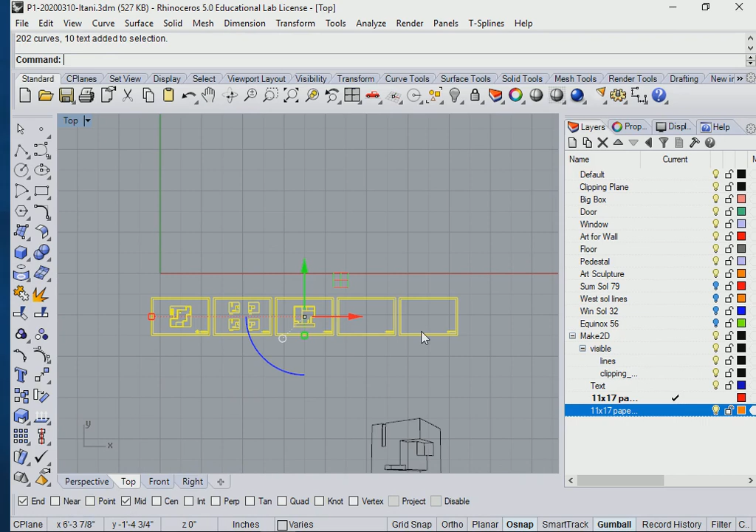It doesn't help to print it at the last moment. It helps to print it ahead of time, in case something doesn't come out, you discover you don't have money in your Bursar's card, the printer is out of ink, or it shows something on the screen but something else comes out of the printer. So this is the life of the architect—they always print ahead of time because sometimes what comes out of the printer is a total shock to you.

Okay, so please, let's get used to doing that. I know it's difficult when you have deadlines. Believe me, we know what that means.

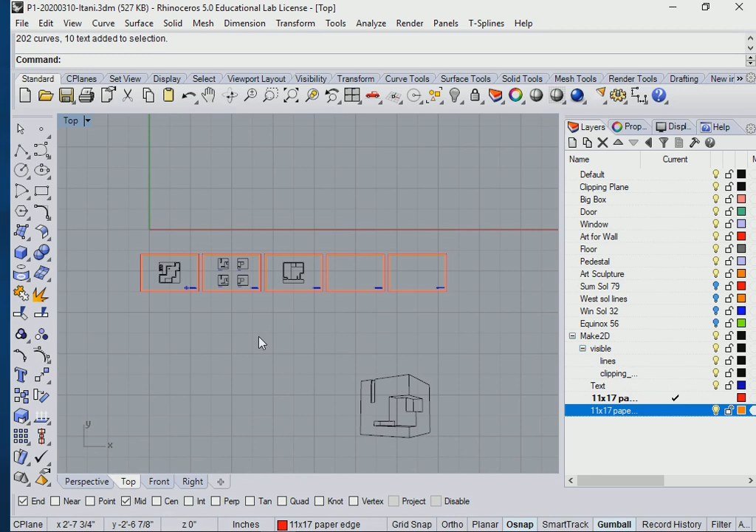You're going to have a floor plan. The floor plan gets a north arrow, and it's going to be 1/4 inch. You're going to have exterior elevations, tied elevations, at 1/8 inch. All the elevations are together and they're going to relate to each other.

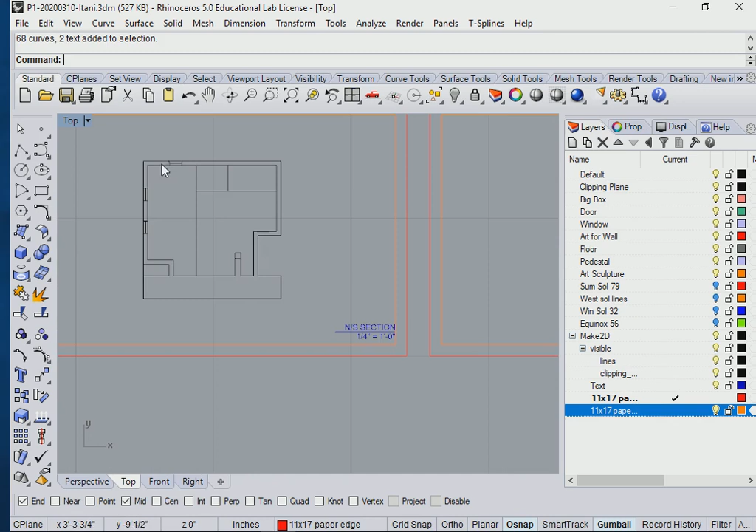You're going to have a north-south section. The north-south section shows the art pedestal and your 3 windows facing south. Then you're going to have your east-west section—see how pretty this east-west section is? The east-west section includes your west-facing window and your art piece on the east wall.

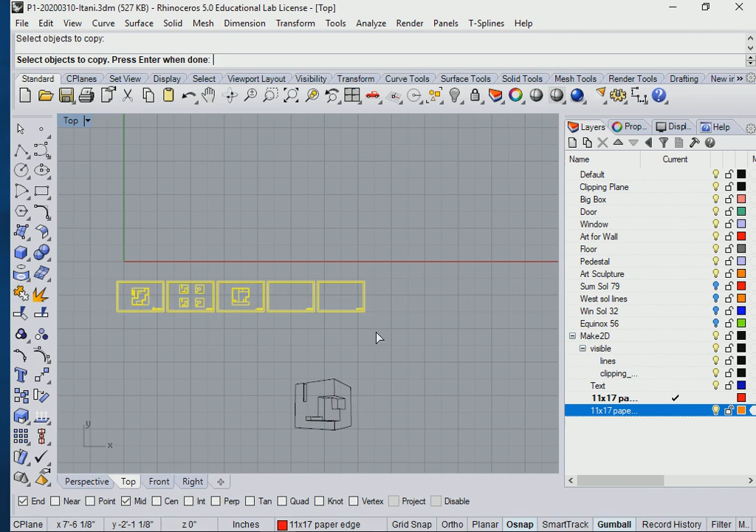And then you're going to have a perspective also, and it's going to talk about the appropriate scale and views that we talked about in class. So please have this printed next time. Your border and your border paper is not going to be printable—they're going to be locked.

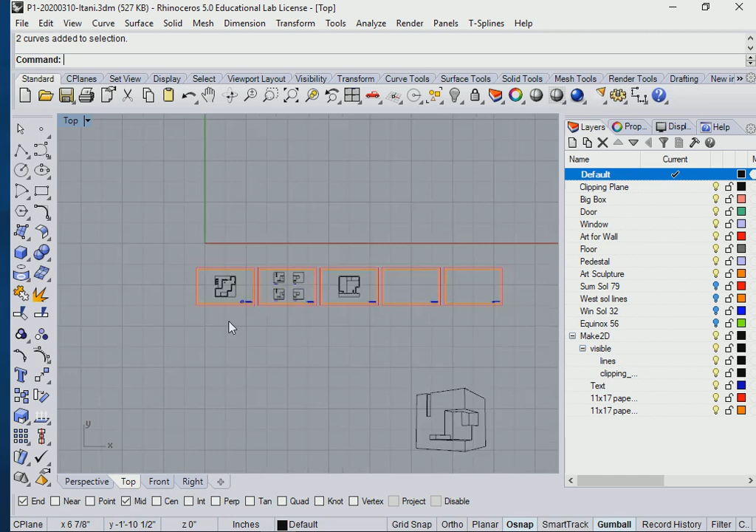Okay, so how do you print this onto paper? How do you make that work? Okay, you're going to go to one of these. You're going to go to File. You're going to go to Print. Okay, and then you're going to go here.

So to print these guys, you're just going to go to File, Print, and you're going to choose the printer. Which printer do you want to print on? You tell it, first you want to print to a PDF—you want to do a digital print. And then you open the digital print, the PDF, and then you print to the real printer from there. So the first one is Adobe PDF.

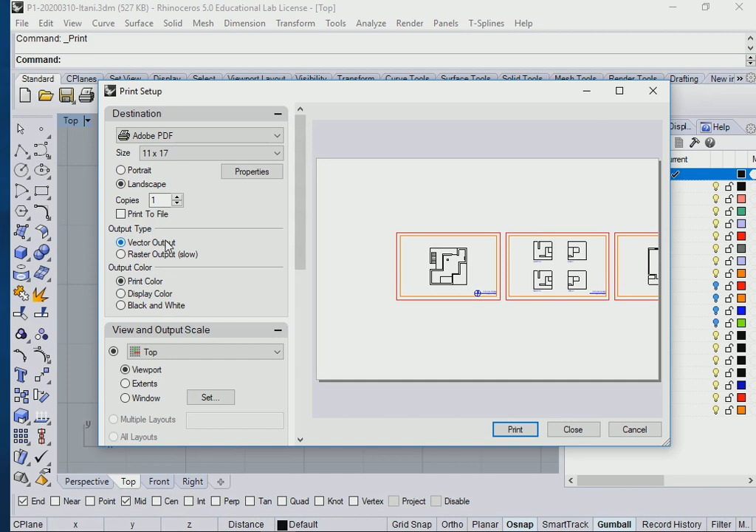Okay, and you choose 11 by 17. And is it going to be portrait or is it going to be landscape? It's going to be landscape. Okay, vector output—that means just line work, no photographs, right? Vector output. Do I print in color? No, you're going to be paying more money.

If I click this button, it's going to charge me more. And why do I need to pay for it if I didn't draw anything in color? So make sure you click on black and white, okay? Not color, black and white.

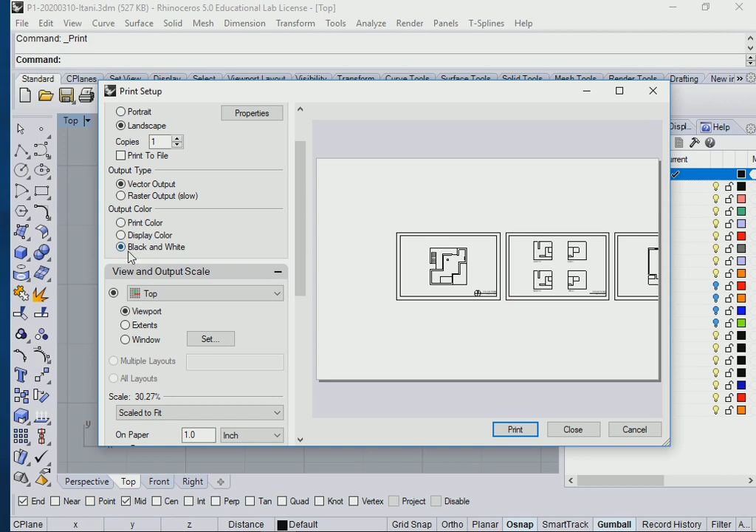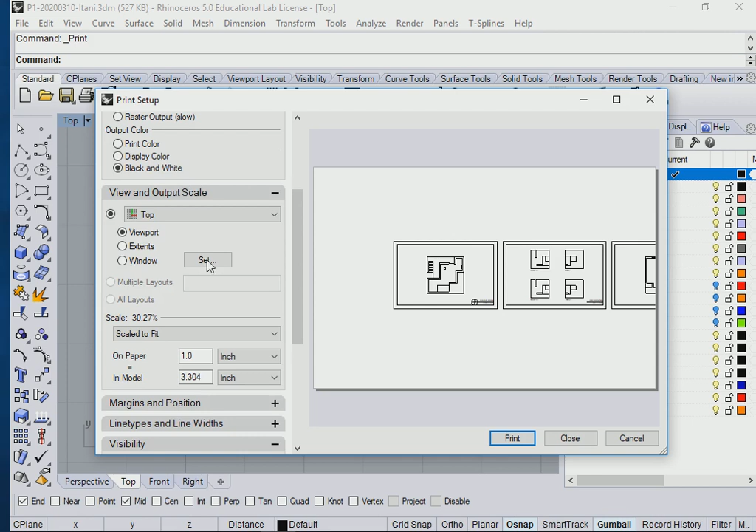And which view? Well, it's the top view, because your 2Ds went to top view. So you choose top view here, okay? And then underneath the top view, you click on window. You don't want to print this and this and this—you just want to print this. So you go to window. It says, oh, you want a window? Okay, then tell me where the window is. Now I'm going to show it where the window is.

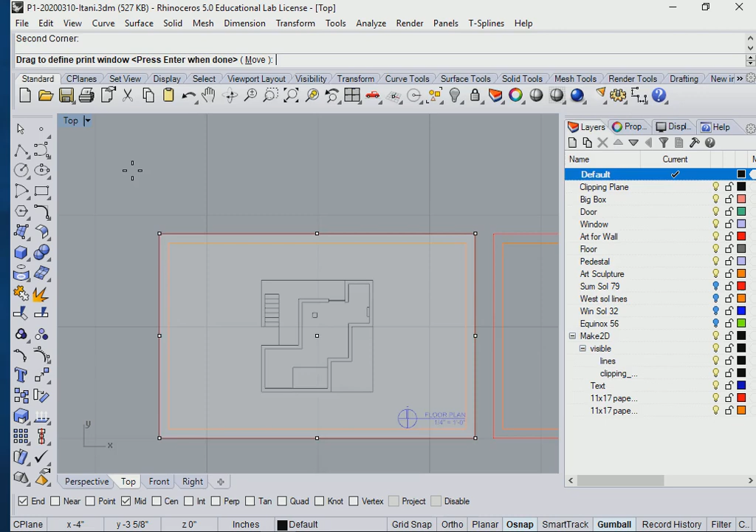Go approximately from this red line, right there, and it's going to snap. Go to the other red line. And then when you're done, press Enter—I'm going to press Enter on my keyboard. Okay, now let's scroll down for more options. Scale—do I do a scale to fit?

Do I do... oh, we drew this as a 1/4 inch, so let me find my 1/4 inch. Is that right?

Remember this: you're printing on paper and you've already scaled your digital drawing. If you scale it again here, then you're scaling it multiple times, and that is wrong. You scale it once, okay?

And you've already done so. So go here and find where it says 1 to 1. Don't even do scale to fit. If you do scale to fit, it's still going to mess up your scale that you've already worked hard on making. It's going to scale it a little bit up or down to fit it on the sheet.

And it's the wrong scale still. So you go to 1 to 1. Okay? Perfect, 1 to 1. Don't worry about that it says 1/4 inch, and don't do scale to fit. I'm telling you right now, it's on video. I'll play the video back if somebody does this.

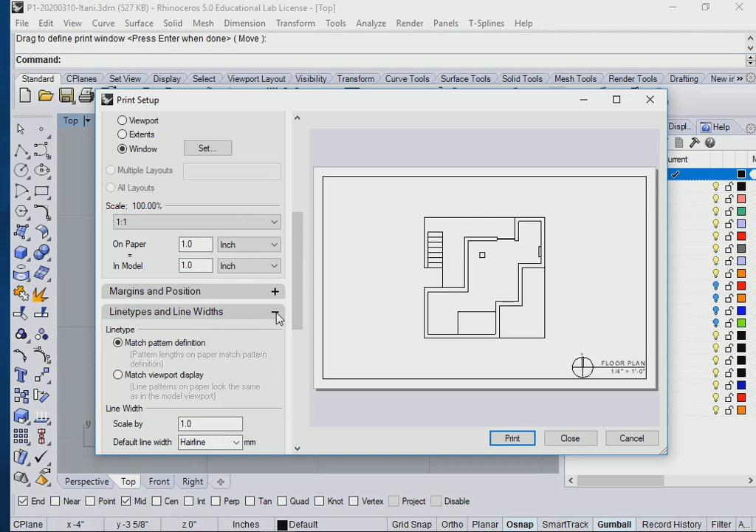Visibility is important. Do you guys remember that we took the 11 by 17 and we locked them? I don't want that border around my sheet, I don't want that picture frame—it was just for my construction. It's a construction line, so under visibility, I'm going to say show locked objects. No, so I'm going to uncheck it.

Printer details, I don't think you need to worry about that. Okay, and I think that's pretty much it. Then you go ahead and click print.

And it tells you, okay, I'll print it for you as a PDF format, digital. Tell me where you want to save it. Save PDF file as—I'm going to keep that same name, but I'm going to call it FP for floor plan, right?

And what am I going to do? I'm going to change the date. What's the date today? 12? So it's project 1, this is the date, it's FP for floor plan.

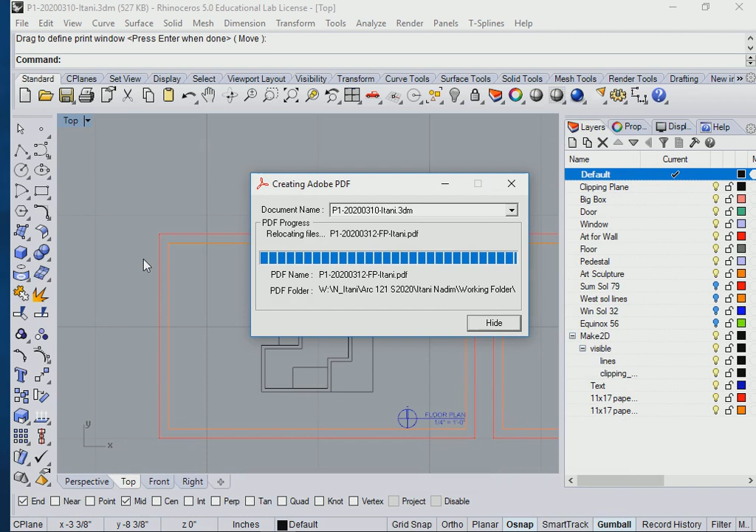I didn't put it in homework because it's not digital homework, it's paper homework. So did this work? No. So that's what I'm going to get—it's going to print that outline. So something doesn't work, something didn't work.

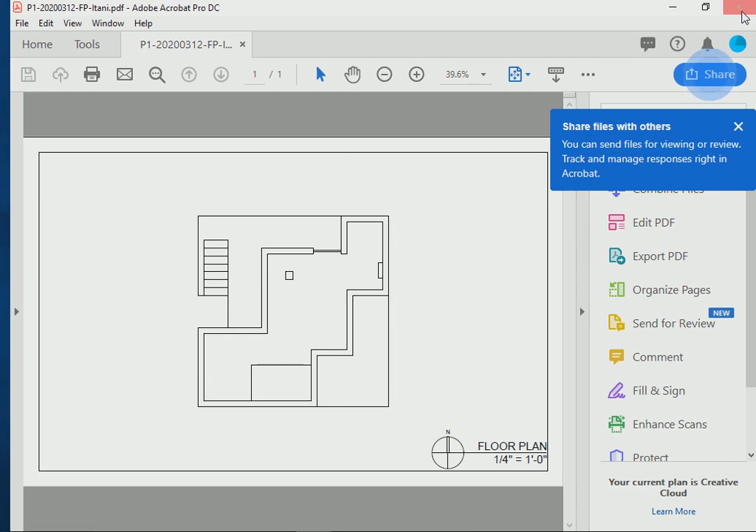So I got to go back and redo it. Oh, I didn't lock him? I thought I had him locked. Okay, so I'm going to close this, and I go back and do the same thing—lock him. See that? I made the mistake, I got to go back and lock it.

So Control P on the keyboard. All this is the same—vector, black and white, top. The window's the same, okay. 1 to 1, 1 to 1.

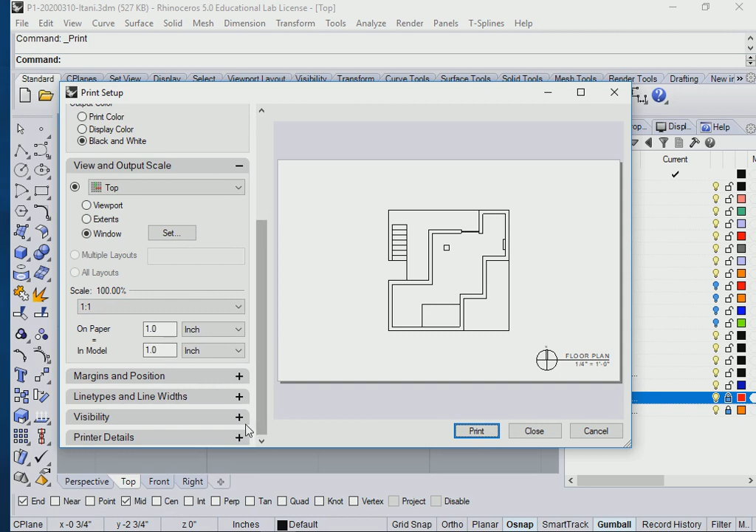Now I go ahead and print. And it's going back to the same place. Yeah, overwrite—I can overwrite it by selecting this guy. Save. It says, do you want to replace the one you already have? Yes, please, resave it.

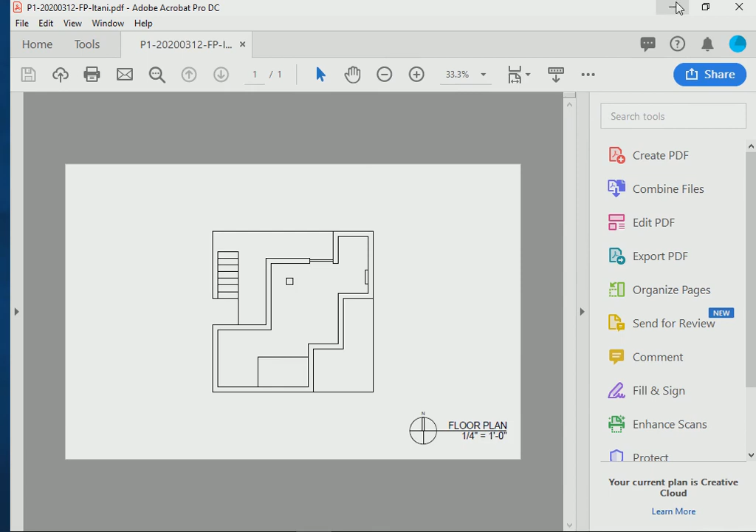Now that's what I want. Okay? Fair enough, does that work? It's pretty clean, right? Okay, so you do that for all your 5 drawings, please, and that would be what you bring in with you. That's all I want from you on Tuesday. All right.